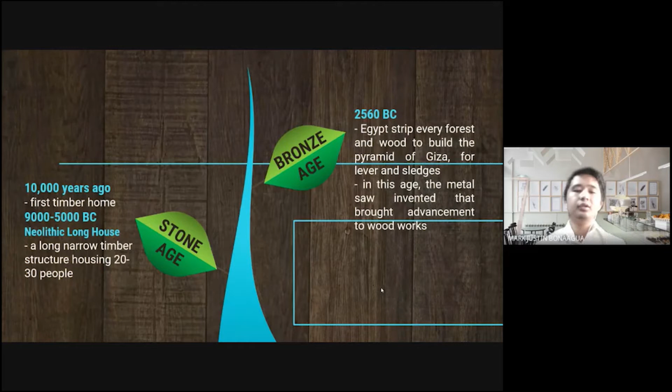Dumako naman tayo sa history of wood. Since ancient times pa nga lang, ginagamit na natin ang wood. Tulad sa Stone Age, around 10,000 years ago, na-invent o nagawa yung first timber home. Tapos, around 9,000 to 5,000 BC, nagawa yung Neolithic Longhouse. Ano ba yung Neolithic Longhouse? Ito yung parang isang long, narrow timber structure na kayang mag-occupy ng 20 to 30 persons.

Tapos, dito naman sa Bronze Age naman tayo. 2560 BC, yung Egyptian ay kinalbo yung mga forest at pinagkukuha yung mga woods para gamiting lever at sledges para sa kanilang pag-build ng Pyramid of Giza. Dito rin sa Bronze Age na ito na-imbento yung metal saw. Dahil dito nagkaroon ng advancement sa woodworks.

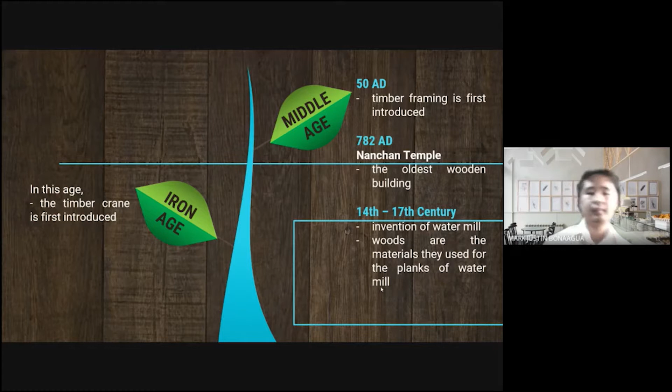Ngayon, sa 21st century, kung babasahin natin sa Pilipinas, hindi na masyadong ginagamit sa construction ang woods dahil may pinagbabawal na sa paggamit ng tropical timber dito sa Pilipinas. Pero sa ibang bansa, gamit na gamit pa rin siya, at ang pinaka-popular na paggamit ng wood sa construction is yung rustic log cabin.

Speaking of rustic log cabin, ang Granot Loma ang pinakamahal at pinakamalaking log home sa buong mundo. Ito yung itsura ng Granot Loma.

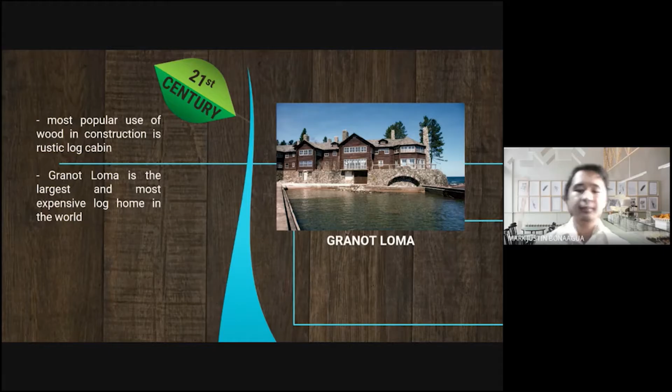Good morning. Yung topic ko for today is topic 2, which is structure of wood. Under nito is yung chemical composition of wood, pati na rin yung moisture content ng wood.

First, sa chemical composition of wood, tayo sa cellulose. Yung cellulose yung umuukupa sa kalahati ng wood substance in terms of weight. Yung percentage siya, hindi siya fixed at nakadepende siya sa type of wood sample na gagamitin. It is a long linear molecule with over 7,000 glucoses linked end to end. Habang lumalaki yung puno, yung linear molecules na yun, nag-a-arrange siya into highly ordered strands called fibrils.

Next naman is lignin. Yung percentage niya is nakadepende kung softwood or hardwood yung type of wood. Sa softwood, it's 23 to 33% yung na-account niya in terms of weight, while sa hardwood naman is about 16 to 25%. It is a three-dimensional molecule formed by linking 15 to 18 phenolic units called phenylpropanes.

Magkasama sila ng hemicellulose na i-report ko rin mamaya na tumutulong para pagdikitin yung tubular cells na meron sa wood. Next naman is hemicellulose. It is a polymeric unit made from sugar molecules.

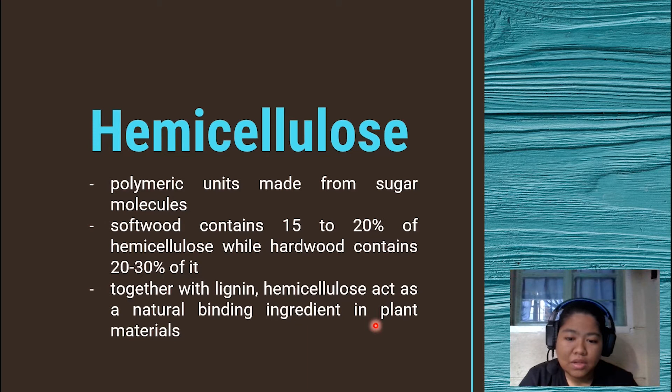Ang kaibahan niya sa cellulose ay merong presence ng sugar sa cellular structure ng hemicellulose. Has 15 to 20% of hemicellulose pagdating sa softwood, at pagdating naman sa hardwood, meron siyang 20 to 30%. Gaya nga nabanggit ko kanina, silang dalawa ng lignin yung nag-act as natural binding ingredients sa plant materials.

Next naman is extractives. It composed of 5 to 30% of wood substance. Kasama dito yung tannins, other polyphenolics, coloring matters, essential oils, fats, resins, waxes, gums, starches, and simple metabolic intermediates kung saan pwede silang matanggal by means of water, acetone, and alcohol.

Responsible naman yung extractives sa durability ng wood para malabanan niya yung pagkalat ng fungi decay and insect injuries.

Last naman sa chemical composition of wood is yung ash-forming materials. It accounts 0.1 to 0.3% of wood material. It includes calcium, potassium, phosphate, and silica.

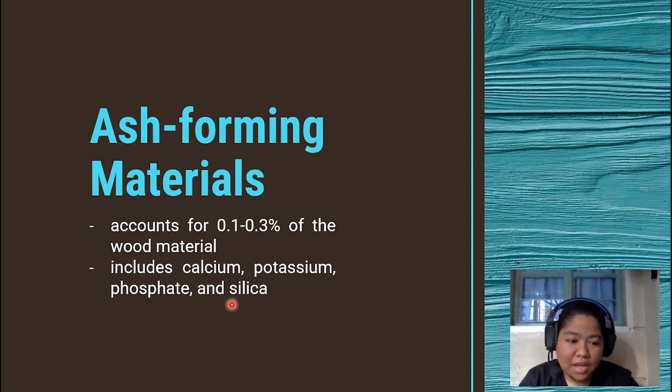Next is moisture content. Moisture is defined as a liquid such as water in the form of very small drops na either makita natin siya sa substance sa surface or kaya pwede rin naman siya nasa air. Yung moisture content of wood specimen is the weight of water in the specimen expressed as a percentage of the oven dry weight of the wood.

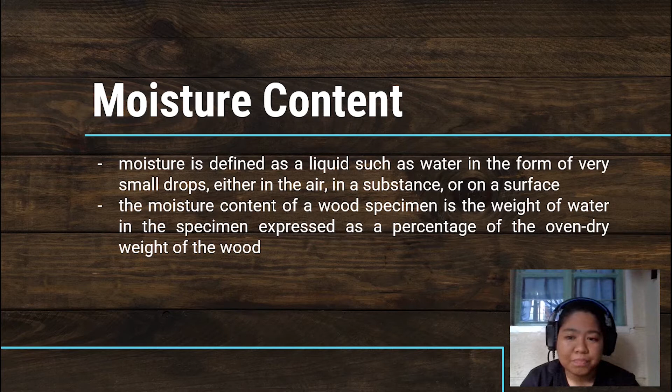Ano nga ba yung kinalaman ng oven dry method sa pag-calculate ng moisture content ng wood sample? Yung oven dry method, ito yung method kung saan na-expose natin yung wood sample into certain conditions, especially sa temperature - na-expose natin siya to high temperature hanggang sa mawala yung presence ng water sa loob ng wood sample. It is usually dried in an oven at 100 to 105 degrees Celsius, o hanggang sa ma-attain na ng wood yung constant weight na kailangan natin.

Yung moisture content ng wood ay nahahati sa dalawa - first is bound water, at yung isa naman ay free water. Yung bound water, ito yung kadalasan makikita sa cell wall ng wood. Sa free water naman, ito yung matatagpuan natin sa cell cavities.

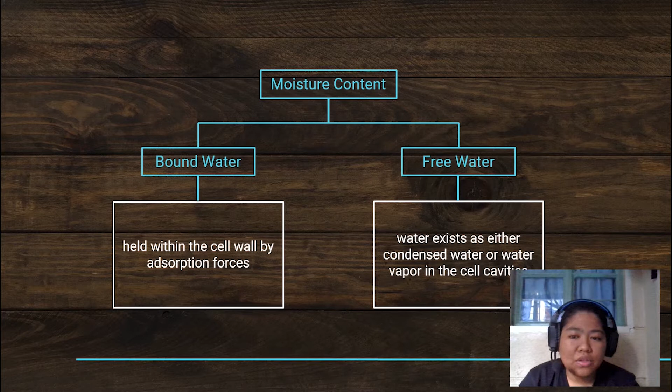Kapag in-expose natin, nag-undergo yung wood sample sa oven dry method, kadalasan nawawala dun ay free water. Kapag naman yung bound water na lang yung natira sa wood, doon na papasok yung FSP o fiber saturation point. It is the level of saturation at which the cell walls are completely saturated but no free water exists in the cell cavities. Nagre-range siya from 21 to 32%.

Sabi dito, if the moisture content of a wood sample is above the fiber saturation point, considered siya as dimensionally stable. Meanwhile, kapag mas mababa siya dun sa FSP, fixed FSP ng wood, so magkakaroon siya ng dimensional changes.

Ano ba yung dimensional changes? Kapag na-expose siya sa init o tubig, nagkakaroon siya ng either swelling o kaya naman shrinkage. Moisture content results to shrinkage or loss of moisture from the cell walls, and swelling naman kapag nagkaroon ng gain of moisture in the cell walls.

So, balik tayo dito sa FSP. Pagdating sa computations, although hindi siya kasama talaga sa report, yung ina-assume na value lagi na moisture content, considering yung FSP is 30%. So, ito lang yung report for the structure of wood.

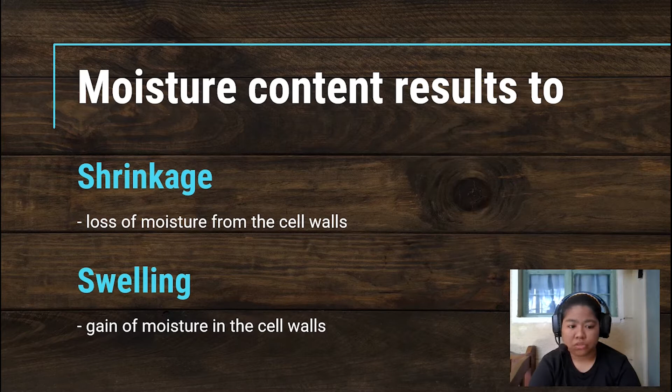And next report is about types of wood and wood production. Good day everyone, I'm Jane Emerald Velaro at ang i-report ko po ay yung types of wood and wood production. So, sa types of wood po muna tayo.

First, there are two classifications of wood, and these are the natural wood and engineered wood. Under the natural wood are the hard and soft woods. So isa-isahin po natin.

Natural wood means trees, including yung logs, yung boles or slabs, trunks, branches, and etc. And yung two types of natural wood are hardwood and softwood. So, hardwood is a wood from dicot angiosperm trees. Ang alam niyo naman po yata, angiosperm, ibig sabihin flowering plant, na divided into two groups, monocots and dicots.

So, monocot have one seed leaf termed cotyledon, and in fact, monocot is short term for monocotyledon. And yung hardwood po is under dicot angiosperm. Dicot obviously having two cotyledons. In temperate and boreal latitudes, they are mostly deciduous, or naglalagas po yung leaves nila annually.

But in tropics and subtropics, mostly evergreen. Evergreen, ibig sabihin green siya throughout the year at hindi naglalagas yung leaves. So, hardwoods are not necessarily harder than softwoods. Self-explanatory naman po, pero sasabihin ko na rin na hindi literally mas matigas ang hardwood kaysa softwood.

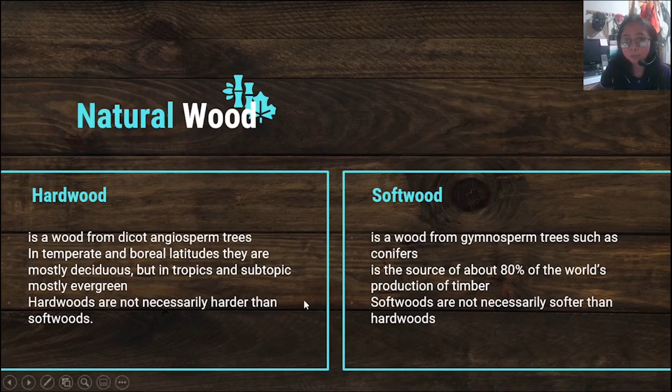And softwood comes from coniferous trees, ibig sabihin trees that keep their needles all year long. Para mas makita yung differences ng dalawa, let's proceed sa next slides. So the following are the hardwood characteristics.

Hardwood have more complex structure than softwoods, dark in color, expensive, slower growth rate, higher density, heavy in weight, more fire resistant than softwood, and strong in compression and tension. So, syempre naglagay din po ako ng examples.

First example, Oak Tree, which is light in color, heavy, ring porous, open grain, hard to work with, and when treated, it looks classy and elegant. Next example is Mahogany, which is easy to work with, reddish-brown in color, expensive, strong, and an excellent carving wood and finishes well.

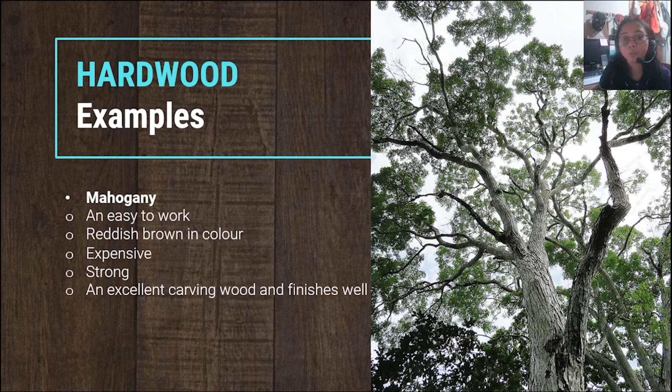Itong next example naman is yung top hardwood tree sources sa Philippines. These are Molave, Camagong, Nara, Yakal, and Tanguile trees. These trees, especially Tanguile, wood can be made into exterior applications like, for example, window frames, walls, floors, doors, and other durable pieces of furniture.

And proceed naman po sa softwood characteristics. Cheaper compared to hardwoods, faster rate of growth, lower density, light in color, light in weight, poor fire resistant, strength in tension but weak in shear.

For examples, first is pine tree, which is soft, white or pale in color, lightweight, straight grains and swelling, knotty. Next example, cedar tree, knotty softwood, red-brown color with light streaks, aromatic and moth repellent, popular wood for lining drawers, chests, and boxes, and brittle wood.

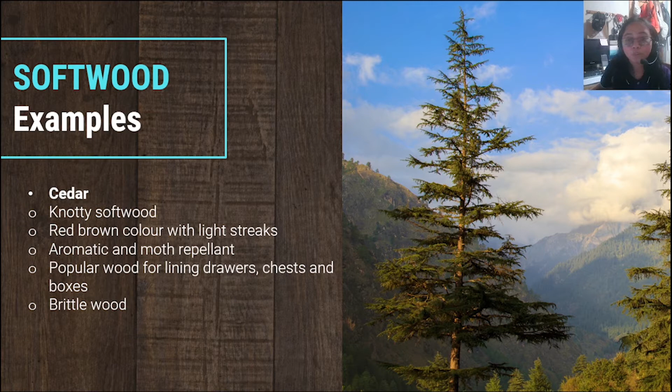And to see for more examples of hardwood and softwoods in the Philippines, visit the link provided sa PPT. Nag-list na lang po ako ng hardwood and softwood sa Philippines po iyan. Kilala po yung mga puno.

Next classification of wood is engineered wood, or also called composite wood, man-made wood, or manufactured wood. From its term po, it is a sort of wood that is being manufactured and is treated with chemicals or heat. It includes a range of derivative wood products which are manufactured by binding or fixing the strands, particles, fibers, veneers, or board of wood, together with adhesives or other methods of fixation to form composite materials. Ang primary material used to manufacture engineered wood products is made from same hardwoods and softwoods.

Engineered wood is a byproduct of natural wood that has undergone a manufacturing process. Engineered wood products are used in a variety of applications, from home construction to commercial buildings to industrial products. So what are the numerous types of engineered wood?

First off is plywood, which is a sheet material manufactured from thin layers or plies of wood veneer. Alteration of the grain is called cross-graining. Cross-graining reduces the tendency of the plywood to split when nailed at the edges. It also reduces expansion and shrinkage, which improves its dimensional stability, and it gives panels consistent strength in all directions.

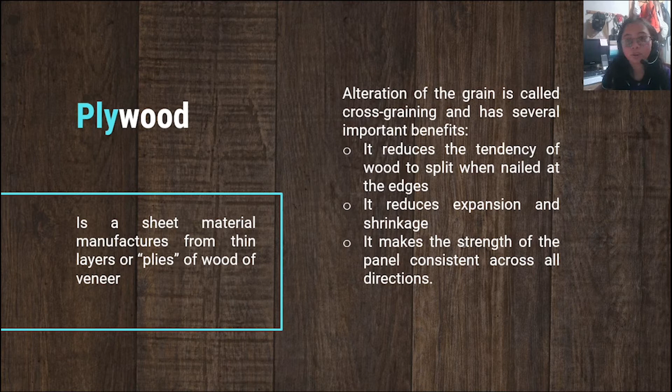The next type is blockboard. It is a wood-based panel made up of a core of softwood strips glued together. Blockboard is ideal for doors, panels, shelves, and partitions. It is made by gluing together a core of softwood strips, and the strips may be up to 25 mm wide, placed edge to edge between veneers of hardwood.

Veneer is another type of engineered wood, which refers to thin slices of wood that are glued and pressed onto core panels. This sandwich is then glued under high pressure to obtain blockboard. The internal strips are generally made of lightweight poplar wood or spruce. To achieve maximum strength, it is important to ensure that the core runs lengthways. Blockboard has very good screw holding and good resistance to warping.

The next type is veneer, which refers to thin slices of wood, usually thinner than 3 mm or 1/8 inch, that are typically glued onto core panels. Veneer is obtained either by peeling the trunk of a tree or slicing large rectangular blocks of wood known as flitches. The appearance of the grain in wood comes from slicing through the growth rings of a tree and depends upon the angle at which the wood is sliced.

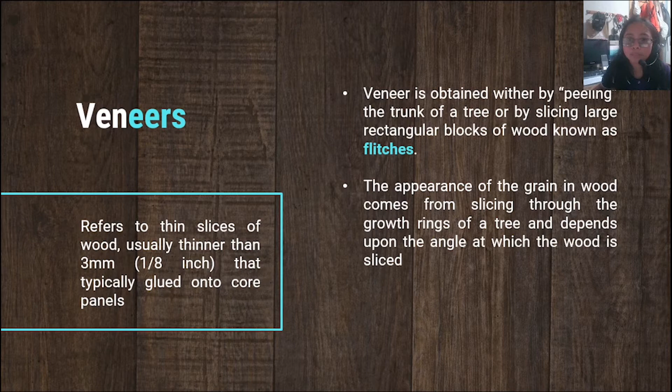The next type is laminates, usually permanently assembled by heat, pressure welding, or adhesives. Lamination is the technique of manufacturing a material in multiple layers, so that the composite material achieves improved strength, stability, sound insulation, appearance, or other properties from the use of different materials. So laminate is made up of several layers of thin wood assembled together with the help of adhesives.

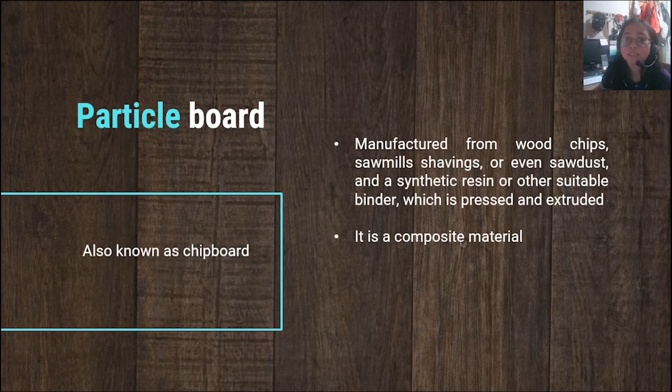Next is particle board, also known as chipboard. Particle board is affordable and environment friendly, and can be used for false ceilings, shelves, furniture, and carpentry. It is manufactured by pressing and extruding various wood waste, such as wood chips, sawmill shavings, or even sawdust, with a synthetic resin or other suitable binder.

Next is medium density fiberboard, or MDF, made by breaking down hardwood or softwood residuals into wood fibers. This is then combined with wax and resin binder to form panels by applying high temperature and pressure. MDF has a smooth finish and consistency—strong yet easy to work with.

The advantage of using MDF is that it is generally denser than plywood, but it can soak up water faster than plywood, making it more prone to damage if used outdoors. As I said earlier, it is very smooth, making it suitable for painting and indoor furniture. So MDF is made up of separated fiber and is stronger and much denser than particle board.

Lastly, high density fiberboard, also called hardboard, or HDF for short, is made out of exploded wood fibers that have been highly compressed. Explaining how HDF is manufactured best describes why it's called high density fiberboard. Essentially, fine wooden fibers are mixed with resin and then subjected to immense pressure. This compression combined with heat results in a composite wood material with high density.

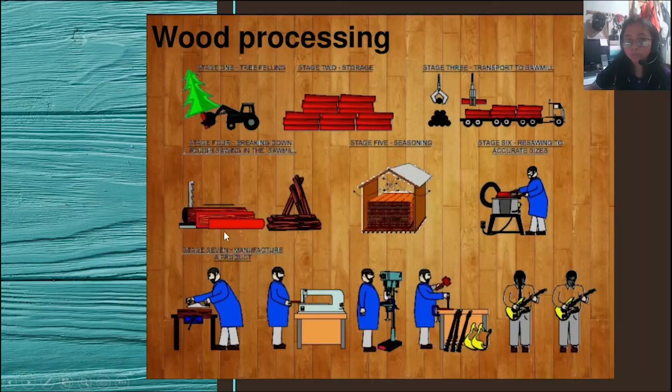Next topic is wood processing. As shown in the picture, this is the process. This was discussed last second year, but I'll discuss it again. This is a very specific manufacturing process of lumber. I'll discuss in the next slides the general process of wood production. This one is very specific, from cutting the tree until it becomes lumber in the market.

First is felling, mostly done with gasoline-powered chainsaws. The cutting of the tree is done on both sides near the base to control the direction the tree falls. The branches are trimmed and the logs are cut into convenient lengths for transport.

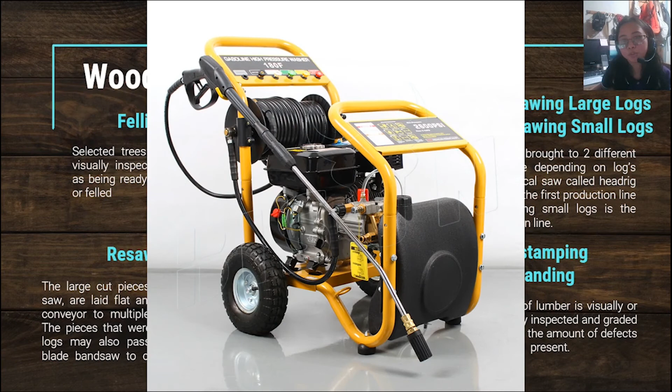Next step is debarking and bucking. In some cases, the outer bark of the logs is removed either with sharp tooth grinding wheels or with high pressure water jets. The removed bark is pulverized and used as fuel in mills and furnaces, or sold as decorative garden mulch.

Next step is cutting. Head rig sawing for large logs and band sawing for small logs. There are two production lines. First is for large logs, using head rig sawing. The worker at the control uses a computer and laser to help position and reposition each log, since the log is repeatedly brought back to the saw.

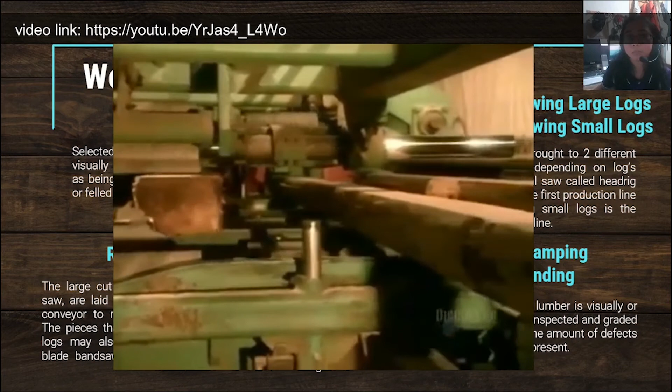Next is drying or seasoning. Both production lines go to a machine that smooths the edges and trims off any defects that could affect the strength and resistance of the wood. It is then moved to an area to dry or season, which is needed to prevent decay and to allow the wood to shrink as it dries out. This can be air-dried or kiln-dried, depending on the required moisture content of the finished piece.

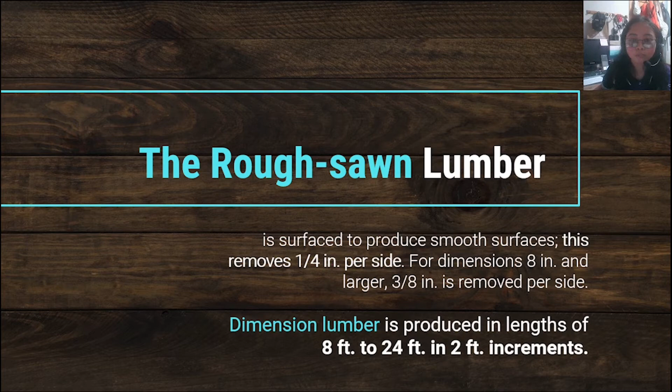Bakit? Kasi nabawas ng 0.5 inch sa parehong side. Ang 0.5 inch ay 1/4 ng 2 na galing sa 2x4. So, dimension lumber is produced in lengths of 8 feet to 24 feet in 2 foot increments.

Next is heavy timber. This is wood sawn on all 4 sides. Common shapes include 6x6 and 8x8 and larger. Heavy timber includes beams and stringers subjected to bending, and posts and timbers used as posts and columns. As with dimension lumber, these sizes specify rough sawn dimensions in inches.

And so round stock consists of posts and poles used for building poles, marine piling, and utility poles.

This is engineered wood, and I already explained it earlier. Let me add that structural engineered wood products include the following: structural panel, structural glued laminated timber or glulam, structural composite lumber, and composite structural members.

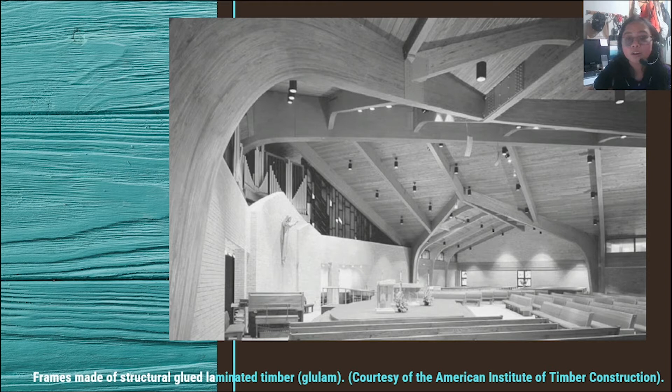Here's an example. What's in the picture is an example of a structure that used engineered wood - frames made of structural glued laminated timber or glulam. This is also an arch made of glulam as well.

Let's proceed to cutting techniques. So of course, after the trees are collected from the forest, these are the next steps. Sawn wood production includes the following: sawing into desired shapes, seasoning, surfacing, grading, and preservative treatment. Preservative treatment is optional.

The sawing pattern selected depends on the cross-section of the tree, the capability of the mill, and the desired product. Plain sawing is rapid and economic, whereas quarter sawing maximizes the amount of vertical sawn cuts. Some of the advantages of the different sawing patterns are summarized in this table.

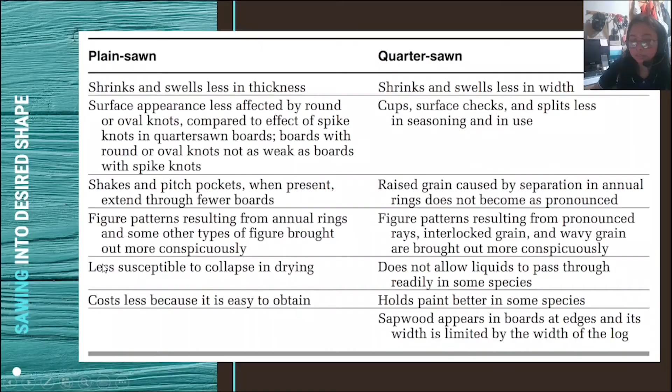This is what I mentioned earlier, that it depends on the appearance of the wood's growth rings. Growth rings or annual rings are the concentric layer system of exogenous trees. Again, the appearance depends on the growth ring, in a sense that the angle the growth rings makes with the face of the board produces three categories of board cuts.

So after the pieces of lumber are cut and trimmed, they're brought to the area to be dried or seasoned. Seasoning - green wood refers to freshly cut wood that has not undergone any drying treatment. In living trees, it contains from 30% to 200% moisture by the oven dry weight. Oven dry weight is the weight of the wood substance after all the moisture has evaporated from the wood in an oven.

For structural wood, the recommended moisture content varies from 7% in dry southwestern states to 14% in damp coastal regions. However, after the process at the mill is finished, framing lumber typically has an average moisture content of 15%.

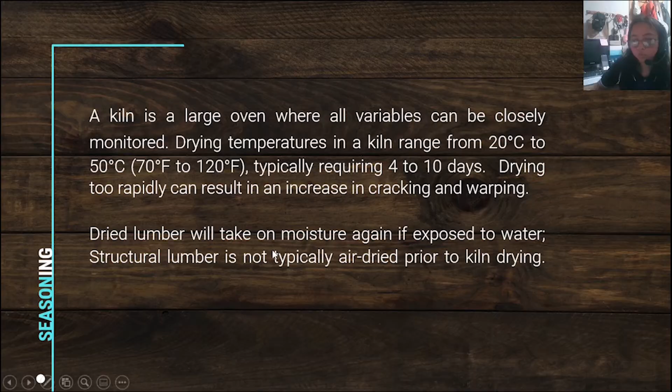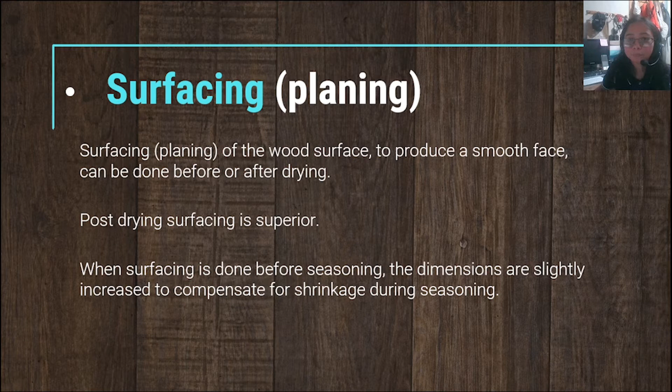Next, final step in lumber production involves grading the lumber according sa quality. Typically, lumber is graded according to the characteristics that affect strength, durability, or workability. The most common grade-reducing qualities of lumber are knots, checks, pitch pockets, shakes, and stains. Due to the high degree of natural variability with lumber, it is nearly impossible to develop an exact uniform set of grading standards. Dahil doon, nagkaroon po ng mga grading techniques at standards sa iba't ibang organizations.

Ang pag-grade po kasi ng wood, by its nature, ang wood po kasi is not uniform consistently and therefore will contain defects that impact the appearance of the lumber that is created from the wood material and syempre, pati na rin ang structural characteristics ng lumber. Kaya po yung grades is ginagamit para ma-define both quality ng product at ma-provide yung estimated cost and waste associated sa given grade ng product as raw material. So, these are the grading systems for both softwood and hardwood lumber.

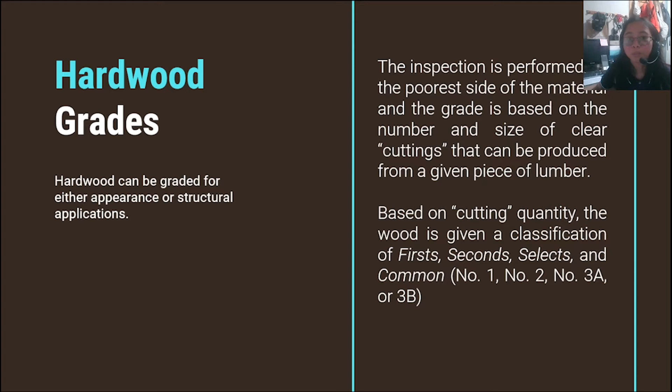First, hardwood grade. Hardwood can be graded for either appearance or structural applications. The inspection is performed on the poorest side of the material and the grade is based on the number and size of clear cuttings that can be produced from a given piece of lumber. Based on cutting quantity, the wood is given classification, ito po yung mga sa hardwood grades, yung mga tawag sa kanila: first, second, select, and common. Common number 1, common number 2, common number 3A, and common number 3B.

For civil engineering application, appearance grades are less important than structural grades. Other grading systems exist and may use some of the same terminologies. Diba, sinabi ko na rin kanina na wala talagang sinusunod na standard and grading techniques, bali magkakaiba sa iba't ibang organization. So, other grading systems exist and may use some of the same terminologies. Pwede magkapareho or pwede magkaiba, so may be used to describe structural grade or an appearance grade in different products.

Next, softwood grades. For structural applications, it is graded by visual inspection and is machine stress graded. Under machine stress grading, each piece of wood is subjected to X-ray to measure density, which is correlated to strength and stiffness. Alternatively, the wood piece is subjected to a bending stress and is graded based on the mechanical response. The grade designation identifies the minimum extreme fiber bending stress, tensile stress parallel to grain, compressive stress, and modulus of elasticity of the wood.

For visual classification, the basic mechanical properties of the wood are determined by testing small clear wood specimens. Visual grade designation includes, ito naman po yung mga tawag sa softwood grades: yard, structural or factory, and shop, with subgrades of select: select B, select C, and number 1, number 2, and number 3 commons. Appearance and studs. Other commonly used ratings are construction, standard, or utility, and combinations such as number 2 and better, and standard and better.

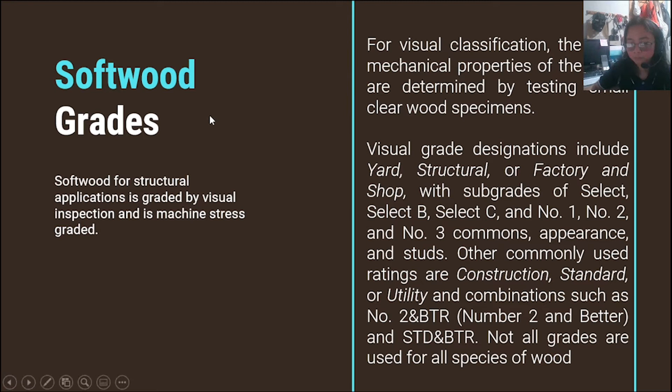Not all grades are used for all species of wood. And that's about wood production. Now let's move to the next reporter.

Good morning, my name is Jaisal Anyunisi Renario, and the next topic I'll be discussing is defects in lumber, a fault in the wood that affects its appearance and utility. But first, let me define defects in lumber. A defect is generally defined as a shortcoming, fault or imperfection, as well as an irregularity or a lack of something required for completeness, or imperfection. Today, I'm going to discuss these various types of defects in lumber.

Lumber refers to all harvested wood, whether in the form of logs, heavy timbers, or members used in light frame construction. Lumber is a strong type of wood that is processed into beams and columns for structural purposes only. The term lumber refers to felled trees, and it's much rougher than timber. Timber and lumber are basically the same type of wood, and the difference between the two depends on which country you're in. For example, in the UK, processed wooden products are commonly referred to as timber.

Typically, lumber will still have its bark. The bark is the outermost covering of a tree trunk and branches, like a protective skin. The primary distinction between timber and lumber is that lumber is less processed than timber. And the defects in lumber that I'll discuss now are also mostly seen as defects in timber.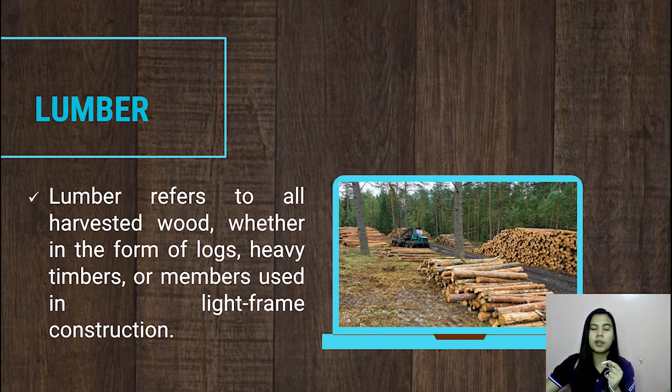Knots, shakes, wane, sap streak, reaction wood, pitch pockets, bark pockets, checks, splits, warp, raised, loosened or fuzzy grain, chip or torn grain, and machine burn are some of the defects that can be found in lumber.

The different types of defects result from a variety of causes, like natural and acquired defects caused by a broken limb or other injury, insect and fungal attack, or rapid tree growth. Some defects are present at the time the wood is formed, while others develop or worsen as the wood ages. Unfortunately, there are very few perfect pieces of lumber available, because lumber is subjected to defects from the time it arises as a seedling to the end stage of seasoning.

First is knot. A knot is a naturally occurring defect in wood. It's a circular flaw caused by broken off branches of a tree. It's easy to distinguish because of its noticeable darker appearance and harder character. A knot is primarily a discontinuity and a place of weakness. Knots are unavoidable because they occur naturally during the tree's growth process. This imperfection is actually one reason why wood is a beautiful material to work with, and it's not just that, because it can also contribute to the structural strength of construction lumber. Some types of knots are rounded knot, cluster, elongated, face knot, edge knot, pin knots, and live and dead knots.

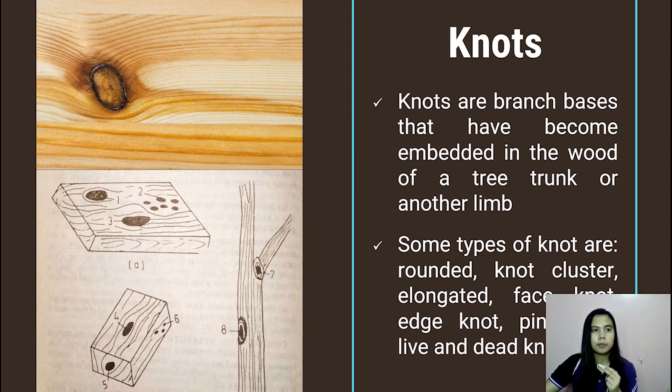The next defect is shakes. Shakes are a more serious and common defect. It is a lengthwise crack or separation of the wood between the growth rings, which occurs along the face of the board and sometimes below its surface. Heart shakes, star shakes, and cup shakes are the most common types of shakes. Although this is a naturally occurring defect caused by strong winds, shakes can also occur during the felling or cutting down of trees into logs, as well as due to shrinkage in the log before conversion of wood.

The next defect is wane, when there's missing wood or an untrimmed edge on the side or corner of a board. That's what's called wane. This defect will only be found in lower grade lumber. In some applications, you may be able to conceal this type of defect by flipping the board over. Edging can help reduce or eliminate wane on lumber. Many customers prefer large timbers with some wane, according to some wood companies, because wane, like other defects, can add character to a reclaimed or other unique wood product.

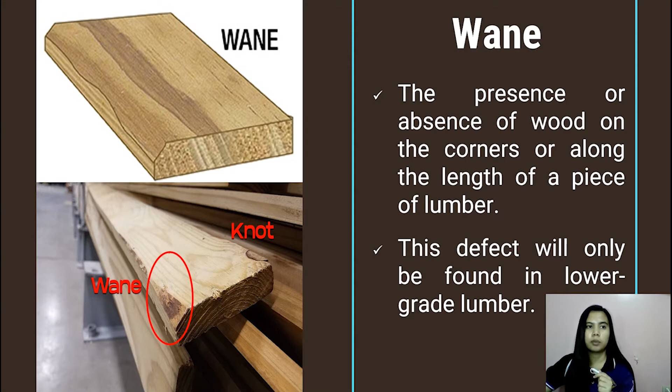The next defect is sap streak. Sap streak is a heavy accumulation of sap in the fibers of the wood, which produces a distinctive streak in color. Sap streaks are discolorations that penetrate the wood fibers and are also known as wood stains.

The next defect is reaction wood, a type of woody tissue that grows in crooked stems or limbs. In growing trees, strong winds cause the trees to sway, making the wood in these areas stronger where the bending action occurred. These reaction wood areas are subdivided into tension wood and compression wood, depending on which side of a bending tree the reaction wood develops. So there may be normal wood areas and exceptionally strong wood areas. At the same time, some parts of reaction wood crack, making it hard to convert into useful parts. Reaction wood causes the pith to be offset from the tree's neutral axis, producing internal stresses that can lead to warping and longitudinal cracking.

Next defect is pitch pockets - well-defined openings between annual rings that contain free resins. Annual rings are the layers of wood produced each year, while resins are clear yellow, sticky substances produced by some trees, used to make varnish, medicine, plastics, or similar chemicals for industrial use. This is a cavity in the wood caused by insects or some impact to the tree. Pitch pockets are typically found only in Douglas fir, pines, spruces, and western larches - trees that are medium to tall, evergreen, needle-bearing, cone-producing, and have a conical or pyramidal shape.

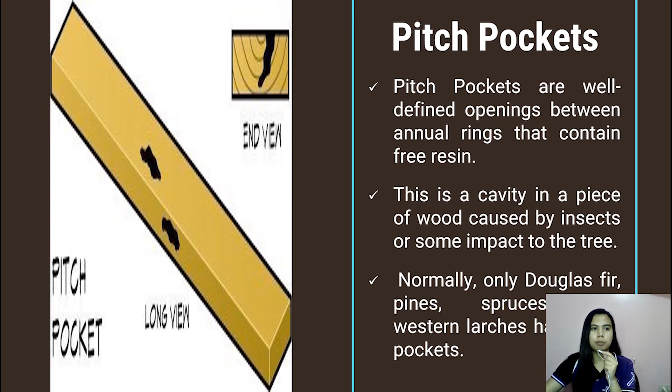Bark pockets are small patches of bark that have become embedded in the wood. This forms when small pieces of bark get embedded into the lumber. This area is considered unsound.

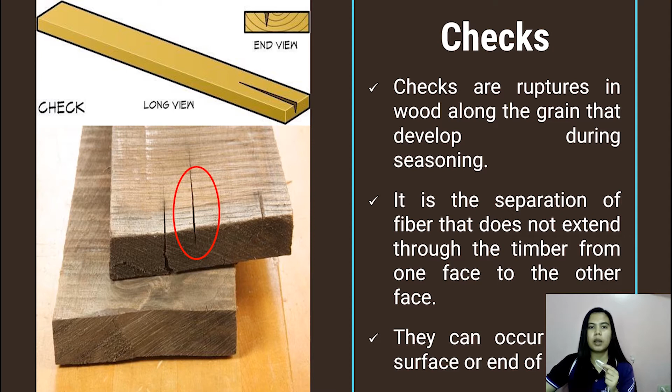Next defect is checks - a crack in the wood that separates the fibers. It doesn't extend from one face to the other, but it appears across the growth rings and is usually caused by insufficient or incorrect drying processes or seasoning. It appears on the surface or end of the board.

Next is splits. If you notice, checks don't extend all the way to the end, but splits are a real separation of the wood due to mishandling or seasoning. Because of the rupture or separation of wood grain, the board's appearance, strength, and utility are reduced.

Warp is distortion of wood from the desired true plane - the wood has deformed from its original flat surface. The four major types of warp are bow, crook, cup, and twist. Warp is caused by differential shrinkage, differential drying caused by the manufacturing environment, or the release of internal tree stress.

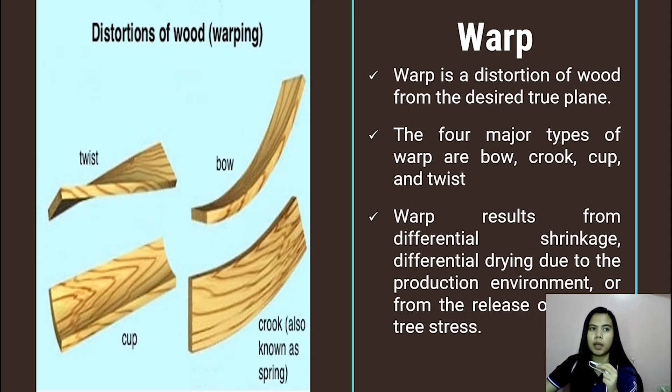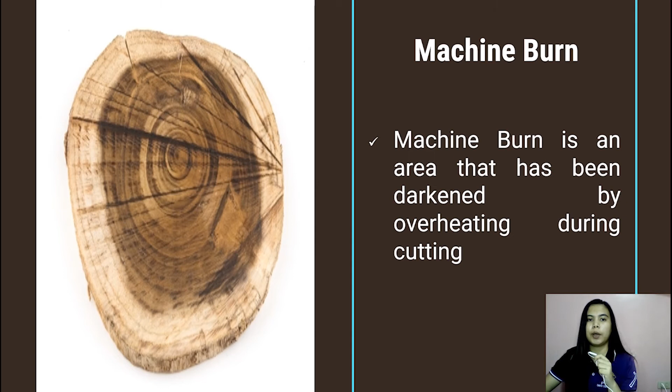Good day, my name is Louise Orleans and I'm going to discuss the physical as well as the mechanical properties of wood. First, let's go to the important physical properties of wood.

These are specific gravity and density, thermal properties, and electrical properties. Specific gravity and density is a commonly cited property of wood - it's also used for water and soil. It is an indicator of mechanical properties within a clear straight-grain wood, and it depends on cell size, wall thickness, numbers, and types of cells.

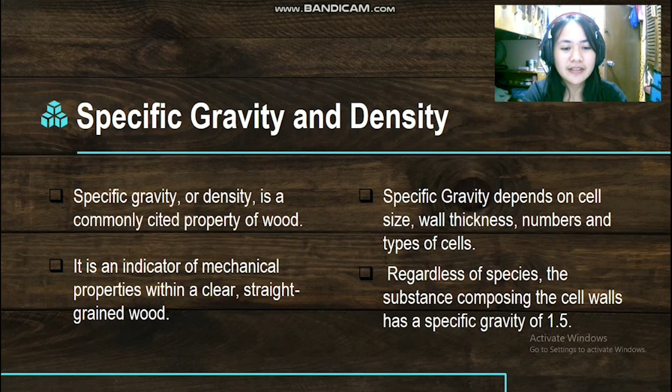Regardless of species, the substance composing the cell walls has a specific gravity of 1.5. So the dry density of wood ranges from 160 kg per cubic meter for balsa to more than 1,000 kg per cubic meter for some species. The majority of wood types have densities ranging from 300 to 700 kg per cubic meter.

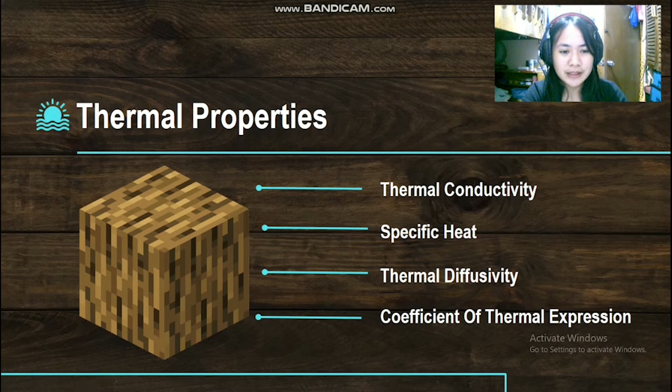So for the thermal properties, we have 4: thermal conductivity, specific heat, thermal diffusivity, and coefficient of thermal expansion. The thermal conductivity is a measure of the rate at which heat flows through a material.

The thermal conductivity of wood is smaller compared to metals and bigger compared to insulating materials or insulators. The thermal conductivity of wood ranges from 0.06 watts per meter Kelvin for balsa and 0.17 watts per meter Kelvin for rock elm.

The structural wood used in construction has a thermal conductivity of 0.12 watts per meter Kelvin, as compared to 200 watts per meter Kelvin for aluminum and 0.04 watts per meter Kelvin for wool.

Thermal conductivity is strongly influenced by moisture content. When wood is dry, the cells contain only air, so the thermal conductivity is very low. As moisture content increases, thermal conductivity increases. When moisture content rises from 0% to 40%, thermal conductivity also rises by about 30%.

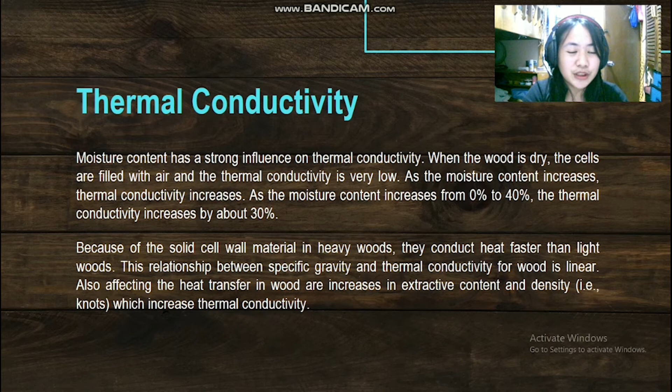Because of the solid cell wall material in heavy woods, they conduct heat faster than light woods. This relationship between specific gravity and thermal conductivity for wood is linear. Also affecting heat transfer in wood are increases in extractive content and density, which increase thermal conductivity.

The second property is specific heat, the ratio of the quantity of heat required to raise the temperature of the material 1 degree to that required to raise the temperature of an equal mass of water 1 degree. As usual, temperature and moisture content are what mostly affect the specific heat of wood.

When wood contains water, the specific heat of wood is increased because the specific heat of water is higher than that of dry wood. The value of specific heat for wet wood is higher than just the sum of the specific heat for the wood and water combined.

That increase in specific heat beyond the simple sum is because of the wood-water bonds absorbing energy. As temperature rises, the energy absorption of wood increases, and their relationship to each other is directly proportional to specific heat.

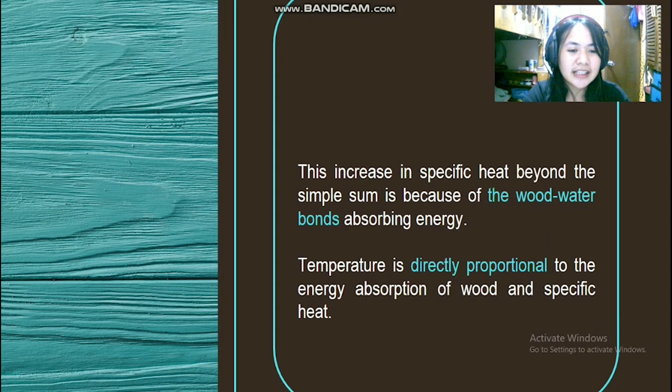So the third thermal property is the thermal diffusivity. It is a measure of the rate at which a material absorbs heat from its surroundings. For wood, it is smaller compared to the building materials we commonly use.

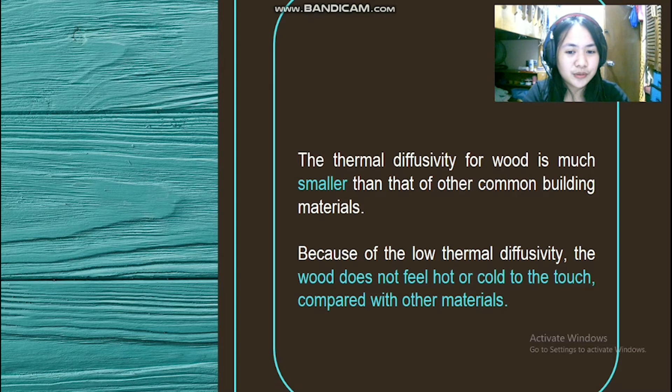Because of low thermal diffusivity, wood does not feel hot or cold to the touch compared with other materials, such as steel which has 0.05 mm per second. Wood has an average of 0.006 mm per second. This is affected by its small thermal conductivity, moderate density, and moderate specific heat.

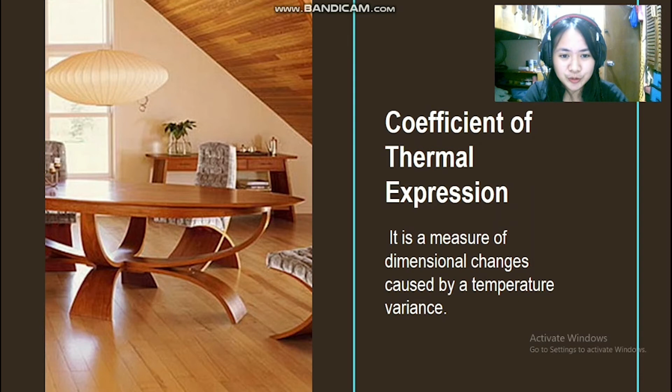So the last thermal property is the coefficient of thermal expansion. It is a measure of dimensional changes caused by a temperature variance. Thermal expansion coefficients for completely dry wood are positive in all directions.

The expansion coefficients are proportional to density and therefore are 5 to 10 times higher across the grain than those parallel to it. For both hardwoods and softwoods, the longitudinal coefficient values range from 0.0009 to 0.0014 mm per meter degree Celsius. When there is a combination of swelling and shrinking, it results in net shrinkage.

So almost all woods, most woods with normal moisture levels, experience or exhibit this reaction.

So the last physical property is the electrical properties of wood. Air-dry wood is a good electrical insulator. The moisture content is indirectly proportional to the resistivity, decreasing by a factor of 3 for each 1% change in moisture content. Once the wood reaches the fiber saturation point, it takes on the resistivity of water alone.

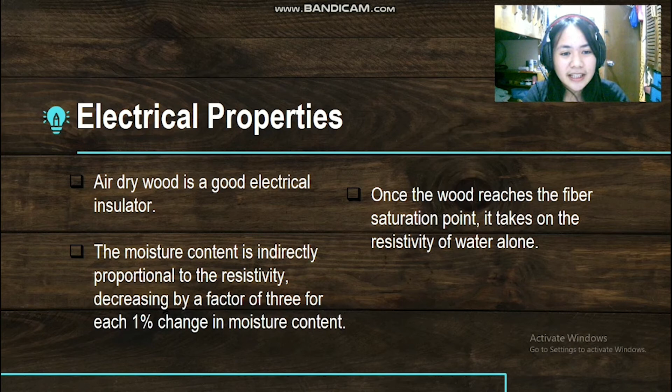So after the physical properties of wood, which are density, electrical properties, and thermal properties, we're going to move on to the mechanical properties of wood. Here we have 4: modulus of elasticity, strength properties, load duration, and damping capacity.

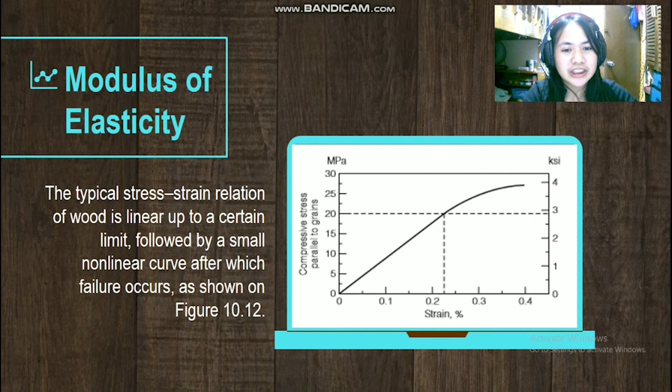So in modulus of elasticity, here you can see the typical stress-strain relation of wood, linear up to a certain limit, followed by a small non-linear curve after which failure occurs. This stress-strain diagram is not always the same, it varies depending on moisture content and specific gravity.

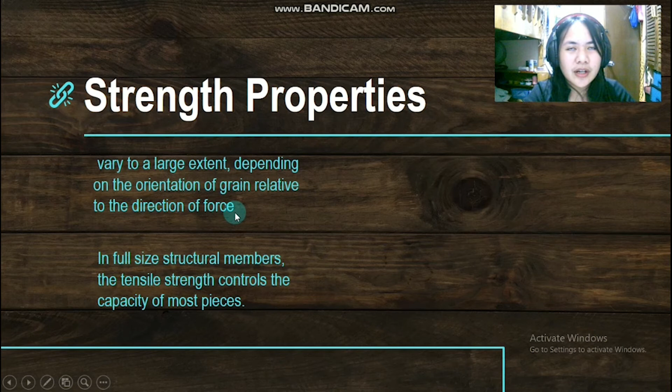Since wood is anisotropic, different stress-strain relations exist for different directions, along the longitudinal, radial, and tangential axis. The second property is strength, which varies to a large extent depending on the orientation of grain relative to the direction of force. In full-size members, tensile strength is mostly what measures or controls the capacity of most pieces of wood.

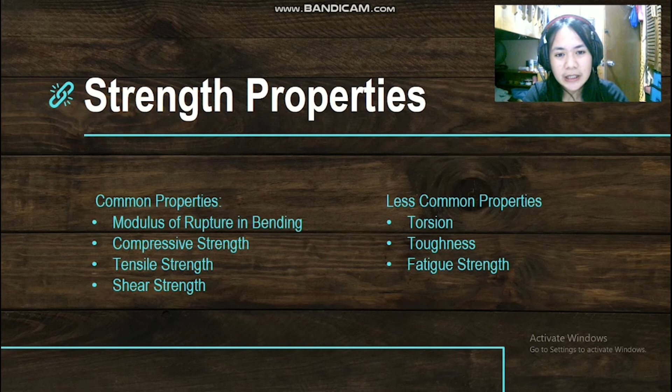These are the common strength properties of wood: modulus of rupture in bending, compressive strength, tensile strength, and shear strength. Less common properties are torsion, toughness, and fatigue strength.

The third property is load duration. Wood usually supports higher loads for a short period of time better than sustained or lower loads over a much longer time. Design values of material properties contemplate fully stressing the member to the tabulated design values for a period of 10 years, and/or the application of 90% of the full maximum load continuously throughout the life of the structure. If the maximum stress levels are exceeded, the structure can deform prematurely.

The last mechanical property of wood is damping capacity. Damping is the phenomenon in which the amplitude of vibration in a material decreases over time. Moisture content and temperature largely govern the internal friction in wood, therefore affecting its damping capacity.

At normal ambient temperatures, an increase in moisture content produces a proportional increase in internal friction, up to the fiber saturation point. Under normal conditions of temperature and moisture content, the internal friction of wood is 10 times that of structural metals, meaning wood dampens vibrations faster than metal structures even if they are similarly designed.

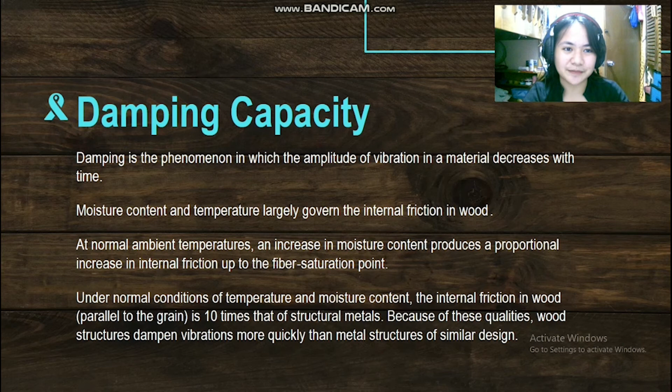The next topic to report is about testing to determine the mechanical properties of wood. We divided this into two ASTM standards, since there are many ASTM standards that could be included regarding wood.

First is ASTM D198, the flexure test of structural specimens. It is performed on members sized similar to what is usually used in structural applications. It determines the flexure, compression, tension, torsion, and shear modulus of wood. This is what it looks like.

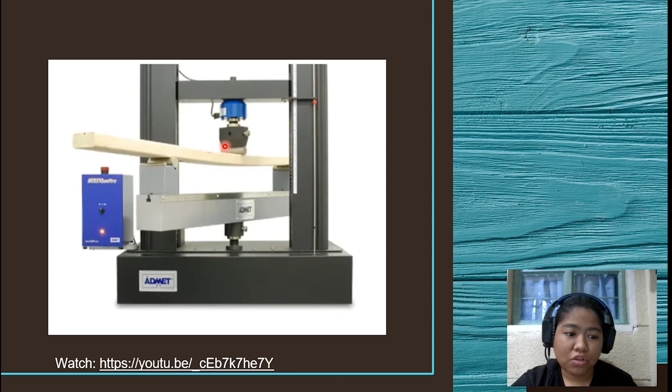The data collected here includes how far it goes before reaching the point where failure of the structural wood member occurs. It includes flexure or bending, compression of short columns, compression of long columns, and tension.

For methods of loading a wood beam, as I mentioned earlier with the picture example, that was point load, the center point loading. There's also an option for 2-point loading, where the load points are equal in distance from left to right, with the weighted part of the testing machine placed there. There's also 3rd-point loading, where the distance is equally divided into three.

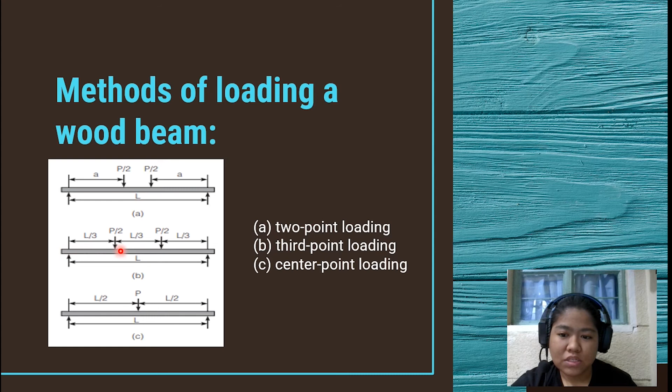Next is ASTM D143, the timber clear specimen test. The difference from D198 is that this only uses small specimens of wood. It can be used to compare the mechanical properties of various species, establish allowable stresses, and determine the influence of density, locality of growth, height, and chemical treatment on the mechanical properties of wood.

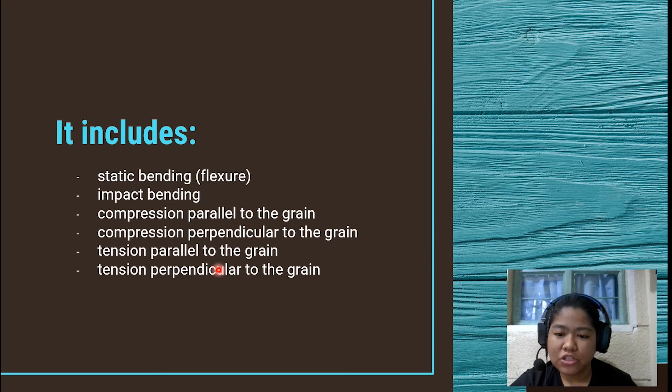So, it includes static bending, impact bending, compression parallel to the grain and perpendicular to the grain, then tension parallel to the grain, and tension perpendicular to the grain.

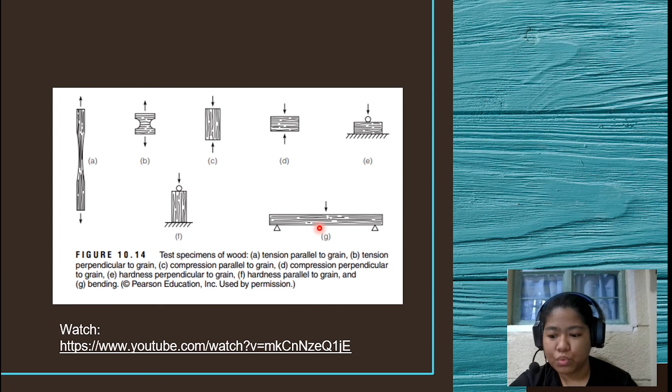So the wood products experience several mechanical testing when used in constructions, manufacturing industries, and furniture. The strength of wood determines its acceptance for the intended application. The woods are needed to be checked for the breaking strength, tension, compression, flexure, moisture, and etc. Wood characteristics are checked so it can be used in construction or furnitures.

So yun nga, tinetest natin yung mga materials natin, especially yung wood kasi sa wood testing tayo, para malaman natin kung pwede natin siyang gamitin. Nakadepende yung sa quality, sa strength nung ating wood, kung pwede ba natin siya gamitin sa construction, sa furniture, o pang design lang sa ating

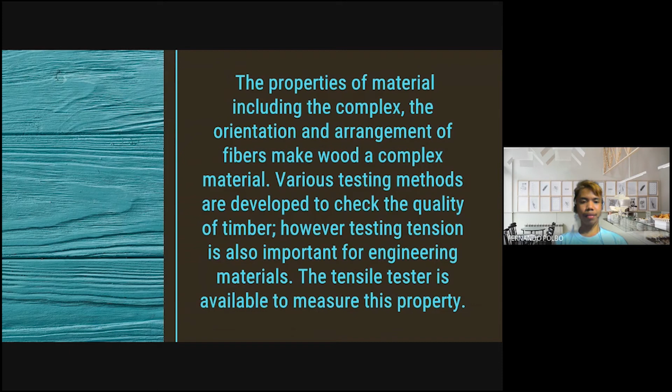construction. First natin na equipment is yung tensile tester. The properties of material including the complex orientation and arrangement of fibers make wood a complex material. Various testing methods are developed to check the quality of timber. However, testing tension is also important for engineering materials. The tensile tester is available to measure these properties. So yun nga, para pag nag-check tayo ng tensile strength ng ating wood, ginagamit natin tong tensile tester.

Next is yung muffle furnace. So ito lagi natin nakikita sa iba't ibang testing, iba't ibang product testing. Ang gamit naman ng muffle furnace o muffle oven is a furnace in which the subject material is isolated from the fuel and all the products of combustion, including gases and flying ash. A tool designed to determine the ash percentage in wooden specimen, and its vital information. So napaka-critical gamitin ng ating muffle furnace. So in any material na tinetest natin dito, i-check niya yung ash percentage, kung gaano kataas yung percent ng ash ng natin ng material, at para magamit natin at ma-check yung quality nung ating wood.

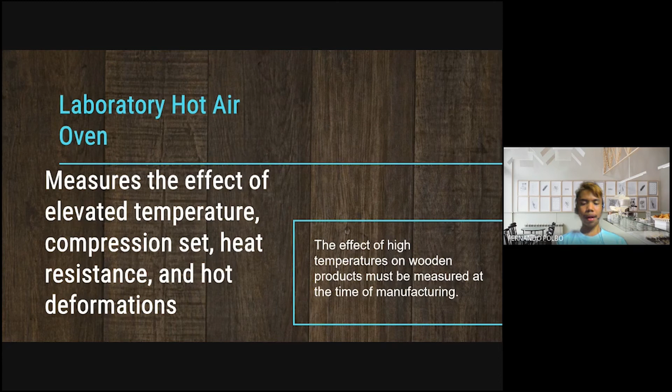Next naman na equipment natin is yung laboratory hot air oven. So it measures the effect of elevated temperature, compression set, heat resistance, and hot deformation. So yun nga, ano ba yung magiging epekto? Yun yung mini-measure ng ating hot air oven. Yung magiging epekto ng pagbabago o pagtaas ng temperature natin sa wood o magiging epekto sa quality para magamit natin sa construction. The effect of high temperatures on wooden products must be measured at the time of manufacturing. Ito yung itsura ng laboratory hot air oven.

Next naman is yung color matching cabinet. Ginagamit siya sa the quality of color is evaluated when the color remains consistent and appears same under different lighting conditions. The color matching cabinet is used for testing the color consistency issues. So ginagamit nga natin yung color matching cabinet natin. Binabago-bago niya yung consistency ng light. At kung magbabago man yung kulay, nakadepende siya kung pwede natin siya gamitin sa design, sa furniture kasi magbabago yung itsura syempre nung ating product.

Next is the torsion testing machine. This is applied to the test sample by anchoring one end so that it cannot move or rotate and applying a moment to the other end so that the sample is rotated about its axis. This also measures the torsional strength, stiffness, and stress strain properties of various materials and specimens.

Yun nga yung nakukuha natin sa torsion testing machine, yung torsional strength, stiffness, tsaka yung stress strain properties ng ating wood sample. So, para matest natin siya, yung parang tinitigil o ina-anchor yung isang dulo ng wood specimen natin, tapos iikot siya sa kabila para makuha natin yung lalagyan ng moment tapos makuha yung torsional strength, stiffness, tsaka stress strain.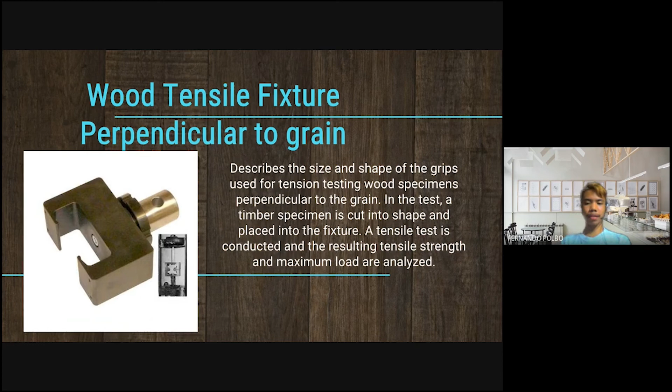Next is yung point flexural bending fixture. It performs static flexure bend and cyclic flexure test. Measures flexural modulus, flexural strength, and flexural yield strength.

So dito nga sa point flexural bending fixture natin, may kadalasan siya is 3 or 4 point, tapos ang pinagkaiba lang nila, magkakaiba sila ng capacity na kaya nila na load. At yun lang yung last na equipment na meron tayo.

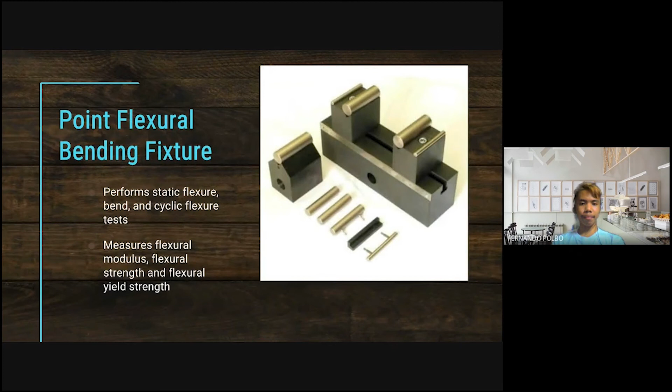So thank you and may next reporter pa.

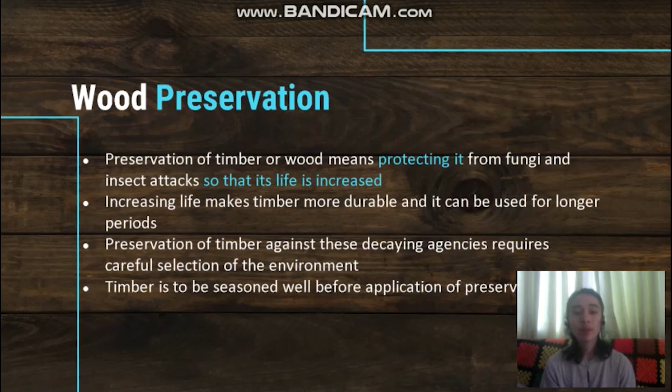So, ano nga ba yung seasoning? Seasoning of timber is the controlled reduction of moisture from the wood. Ito na yung mga saps or yung dagta at tubig na kino-contain ng kahoy. This is necessary for reducing the unnecessary weight of timber, for effecting an increase in its strength, to improve its workability, to reduce the possibility of developmental of shrinkage defects, and to ensure durability of long life of timber.

So, methods of seasoning. Ito yung natural, artificial, chemical, electrical, and boiling method. There are two general methods of seasoning of timber: ito yung air seasoning or yung natural, tsaka yung kiln seasoning or artificial.

Sa natural seasoning or air seasoning, wood in properly cut parts is stacked in a proper manner in open air for losing moisture by process of evaporation. Since natural siya, parang ibinibilad lang talaga yung kahoy sa araw, pero hindi pa rin directly. Nakastack lang siya ng maayos, then pinapapatungan ng parang bubong para nga hindi direktang sikatan or mauulanan.

The stacks are so constructed to allow the free circulation of air around each part as far as possible. Ang disadvantage lang nito is masyadong matagal yung process. Inaabot siya ng 6 months to 4 years.

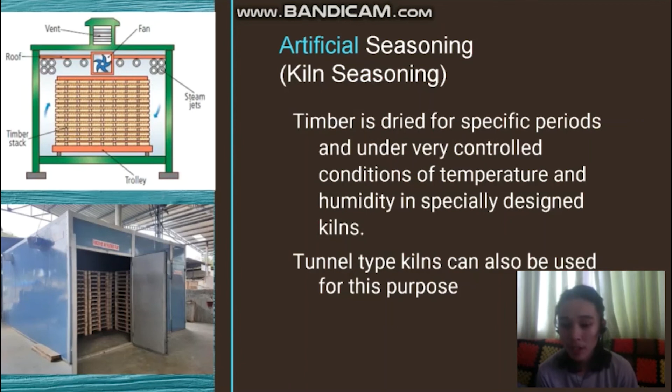So other methods of seasoning are chemical seasoning or salt seasoning. In this method, the timber piece to be seasoned is treated with a chemical solution like sodium chloride, sodium nitrate, or urea. The essential quality of such solution is that it reduces the vapor pressure on the surface of application.

Once such a treated timber is exposed to natural drying, it is the water or sap from the inner cells that moves to the outer cells at lower vapor pressure.

Dito naman natural seasoning lang din yung process niya, kaso bago ibilad, ititreat muna siya ng mga chemicals like sodium chloride, sodium nitrates, or urea. Hence, salt seasoning ang tawag nga sa kanya.

Dahil sa mga chemical na nilagay sa kahoy, yung mga tubig at dagta na nasa inner part ng kahoy ay pumupunta sa exterior, tapos palabas kaya.

Sa ganitong method, unang natutuyo yung loob kahit basa-basa pa rin yung labas ng kahoy.

Next naman is electrical seasoning. Since dry wood is a non-conductor of electricity, but when a high alternating current is passed through a piece of green timber, heat generated is enough to dry out the moisture of the cells which do conduct some electricity.

Dito naman sa ganitong method, mabilis matutuyo yung kahoy. Kaso masyadong mahal yung mga equipment na gagamitin sa ganitong method, tapos malakas ding kumonsumo ng kuryente, kaya hindi siya economical na gamitin.

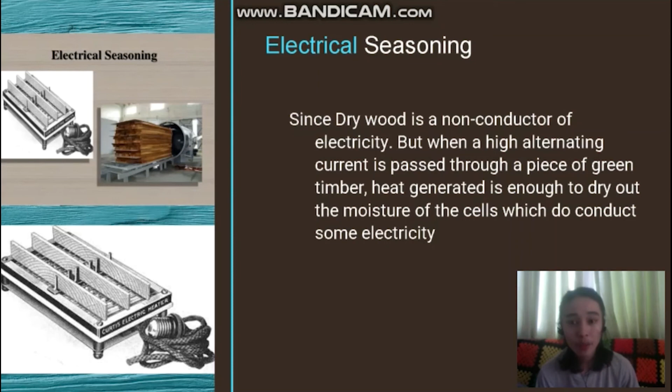Next naman is seasoning by boiling. This is also a quick method of removing sap from within the cells. The timber to be seasoned is immersed in water and the water is raised to boiling temperature. It is kept boiling for 4 to 5 hours.

Habang pinapakulo, nawawash out na yung mga dagta o yung sap sa loob ng kahoy. On placing in air, such boiled timber dries quickly kasi nga natanggal na yung dagta sa loob ng kahoy.

But at the cost of the strength and elasticity of the fibers. Kaya di rin masyado nagamit yung ganitong method.

Next naman is types of preservatives. Ito yung petroleum-based solutions or yung oil-based, waterborne preservatives, and preservative paste.

So first, petroleum-based solutions. These preservatives are very effective, but some are environmentally sensitive since oil nga siya. They are commonly used where a high degree of environmental exposure exists and human contact is not a concern.

Ilang halimbawa nito ay yung mga creosote, at pwede itong apply sa mga utility poles, railroad ties, and retaining walls.

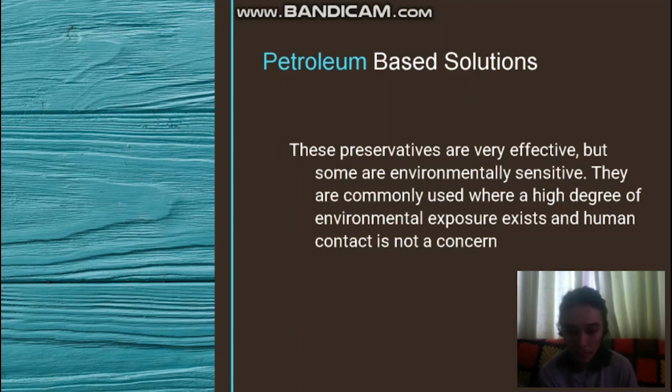Next naman is waterborne preservatives, a water-soluble chemical used to treat wood for protection against decay and insects. Advantage of waterborne preservatives over the oil-based are its cleanliness and its ability to be painted.

Pero kahit mas malinis siya sa oil-based preservatives, mapanganib pa rin siya sa environment, kaya kailangan apply ng maayos sa controlled environment. Disadvantage naman ng ganitong treatment is their removal by leaching when exposed to moist conditions over a long period of time.

Yung leaching naman ay yung unti-unting natatanggal yung chemical kapag na-expose sa moist conditions.

Next naman is preservative paste, formulated by mixing the oil-borne and water-borne types. Yung preservative paste naman ay pinaghalo lang siyang water-borne tsaka oil-based preservative.

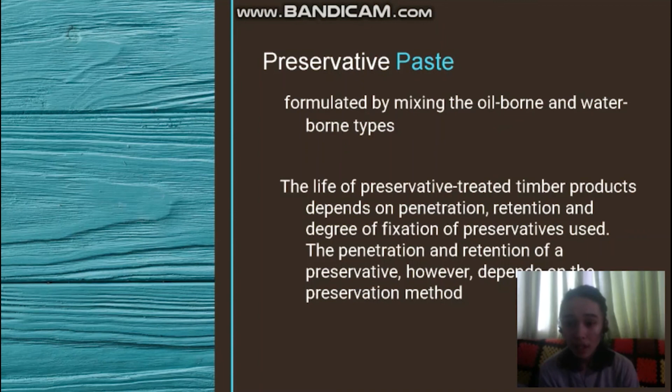The life of preservative treated timber products depends on the penetration, retention, and degree of fixation of preservative used. The penetration and retention of a preservative, however, depends on the preservation method.

Some of the widely used preservatives are tar, which is liquefied uling, paint - the most popular being solignum paint, chemical salt which is chemical dissolved in water, creosote which is prepared by distillation of tar, and ASCO which was developed by the Forest Research Institute and is available in powder form, to be mixed with water when used.

Application techniques. This includes brushing, charring, dipping and steeping, hot and cold open tank, injecting under pressure, and spraying.

Brushing is the simplest method of applying preservatives. For better results, the applied preservative should be in hot condition so it's easier for the wood to absorb it and the texture becomes better. Multiple coats should be applied and a certain time interval should be maintained between successive coats.

Next is charring. Charring is nothing but burning of the timber surface, which is quite an old method of preservation of timber. The burnt surface acts as a coating for the wood. This method is suitable for exterior woodwork such as wood fencing, poles, telephone poles, and such. In this method, the timber surface is wetted for 30 minutes so the wood gains some resistance, and burnt up to a depth of 15 millimeters from the top surface.

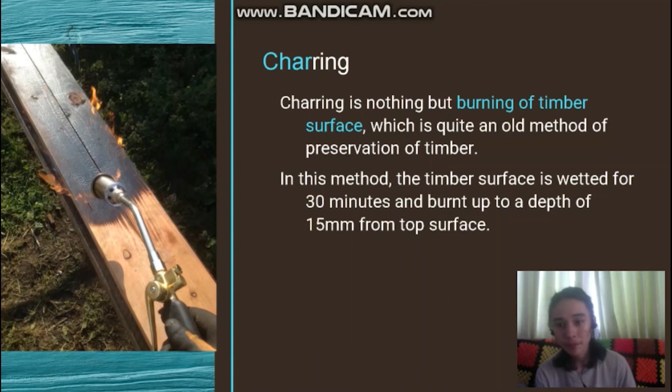Next is dipping and steeping. Dipping consists of immersing wood in a preservative solution for several seconds to several minutes. It allows better penetration into checks and cracks of wood, but is unsatisfactory for use subject to abrasion. With this method, there's only a little protection against termites, and it's not advisable when the wood will be used in contact with soil.

Cold soaking or steeping involves well-seasoned wood soaked for 2 to 7 days in a vat containing a low viscosity oil-borne preservative; it is simple and relatively inexpensive. It is thought to give more protection than dipping. The penetration and retention depend on the type of wood. So to simplify, dipping is just dunking the wood into the solution, while steeping or soaking means submerging the wood itself in the solution for a longer time.

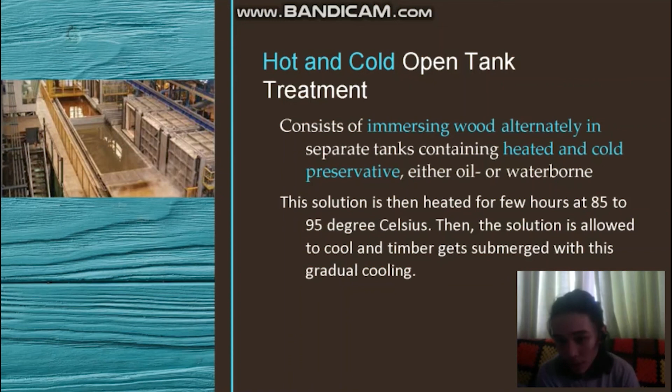Next, hot and cold open tank treatment. This consists of immersing wood alternately in separate tanks containing heated and cold preservatives, either oil or waterborne. While the wood is in the hot solution, the air inside expands and escapes, and this is what allows the preservative to penetrate the wood. Once the wood is transferred to the cold solution, the wood contracts, causing the preservative that entered to penetrate even deeper. This solution is heated for a few hours at 85 to 95 degrees Celsius, then allowed to cool, and the timber gets submerged during this gradual cooling.

Next is spraying. Spraying is a more effective technique than brushing. In this case, the preservative solution is sprayed onto the surface using a spray gun. It is time-saving and quite effective - faster to apply than with a brush.

Injecting under pressure: the wood is placed into an airtight steel cylinder and immersed in a preservative. Increasing pressure drives the chemical into the wood. This is the most effective of all the methods of wood preservation, so even though the equipment used here is expensive, it pays off in the quality of preservation.

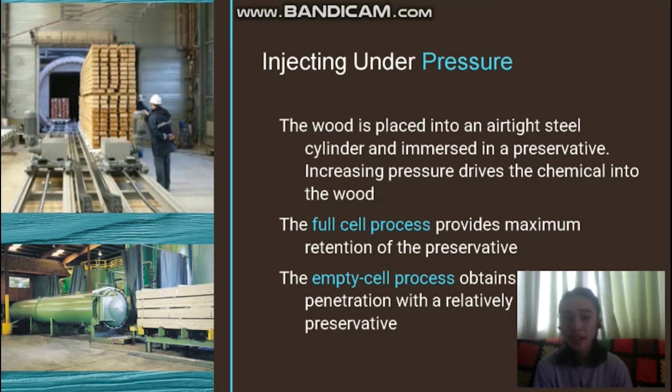Varnishing versus wood preservatives. Varnishing is a liquid coating material containing a resin that dries to a hard transparent film. Most varnishes are a blend of resin, drying oil, dryer, and a volatile solvent. On the other hand, preservatives penetrate the wood, and although they don't normally form a hard protective coating, they nourish the wood, and often maintenance is easier and more cost-effective than with varnish.